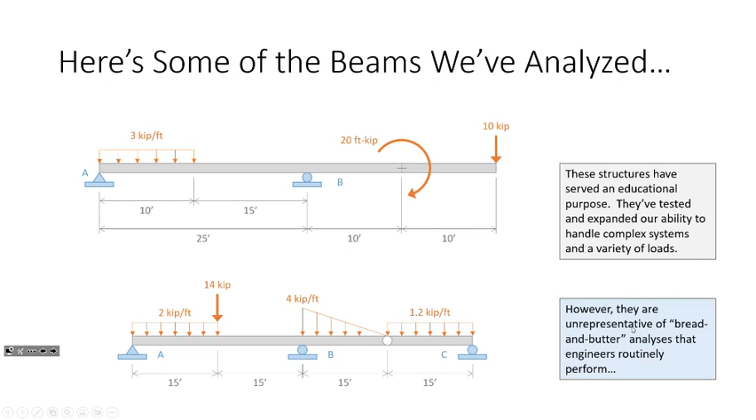These problems each contain components that you will have to deal with in the real world. We've seen how you need to understand how to deal with concentrated moments in order to apply virtual work to determine rotations in beams. You do have to deal with triangular loads for things like hydrostatic effects and snow. But I'm just going to be frank with you. You are not going to deal with these in the real world. You're just not. I'd love to be able to tell you that you were, but these are not representative of bread and butter analyses that engineers perform on the regular. This is not normal. It just isn't, okay?

That's normal. It is a normal beam that an engineer might need to deal with. Now, I want to take a look at these two beams, okay? So the beam on the left is a cantilever beam with 3 kips per foot distributed over its length, and is 25 feet long. Now the beam on the right is 37 feet long, and it has a distributed load of 1.95 kips per foot over its length. Is there really any difference between these two problems? Really? No. You might say that the only difference between these two are the values of their system parameters.

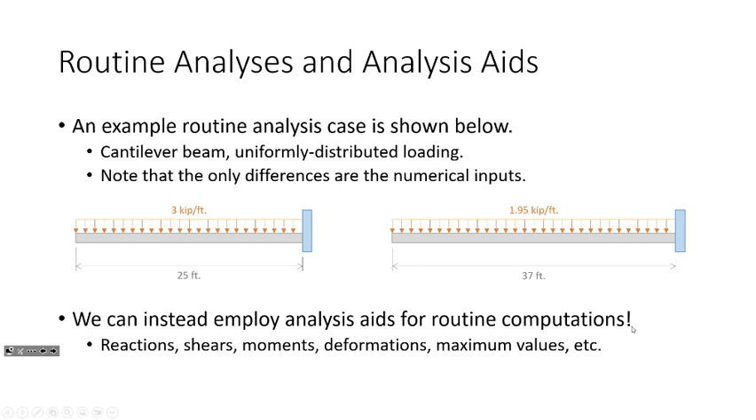So that's the truth. I mean, really, the only differences between these two problems are their numerical inputs. Structural engineers might have to deal with these problems very routinely: cantilever beams with uniformly distributed loads. The only thing that changes are the lengths of the beam and the loads, but the scenario is the same. Instead of having to analyze this beam over and over and over again, why don't we develop some formulas or some analysis aids to handle these routine computations?

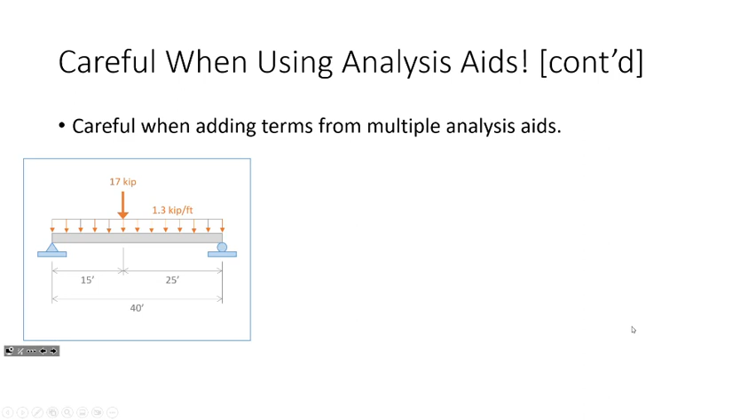Now another thing you've got to be careful about is when adding terms from multiple analysis aids - I'm talking about superposition. Take this beam: it's simply supported with two loads on it - a uniformly distributed load of 1.3 kips per foot. I can look up its Mmax formula, WL squared over 8, and that occurs at the middle.

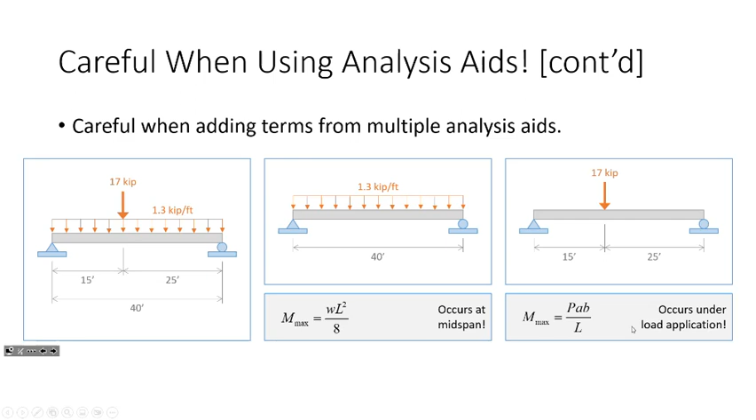Now what about the 17 kips? Its Mmax is computed as PAB over L, where A and B are these two lengths - so it'd be 17 kips times 15 times 25 over 40, but that Mmax occurs at a different location. So you can't just take this value and that value and add them up. It's a common mistake I see engineering students make, and that's wrong, because those maximum points on the moment diagram aren't at the same place along the span.

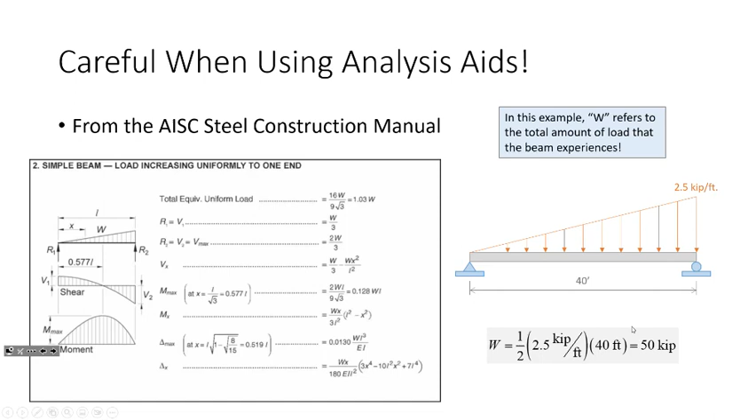So instead of adding Mmax and Mmax, go to the analysis aid and actually add the functions. Then you can either differentiate, solve for X, and plug in, or just do what I do - plot it in Excel. Plot this moment diagram, sum them up, find where the maximum moment is, and use that. Just don't take this Mmax and add it to that Mmax, because they're not in the same spot. Does that make sense? Everybody okay with that?

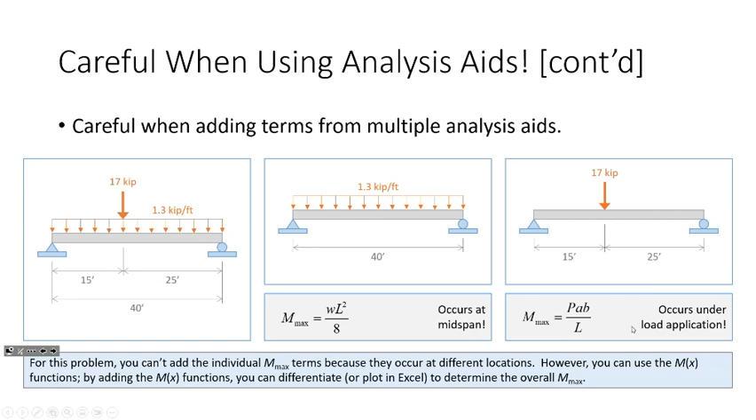So to explain how these work, I want to derive the analysis aids for that beam - the same one we looked at before. I want to look at the reactions, the shears, the moments, and the deflections if time permits, and we're going to get the same answer we got right here. I want you to understand where these come from. If you take me for steel design, we'll use some of these near the end of the semester, so I want you to see where they're coming from.

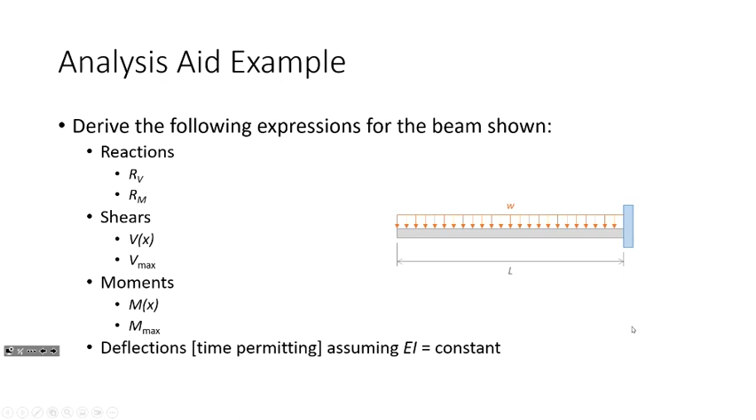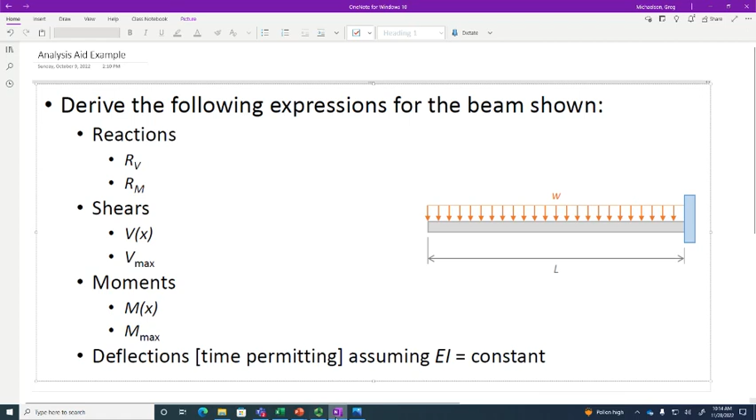All right, so let's see. What we're going to do is derive formulas for each of these components. Let's start off with the reactions.

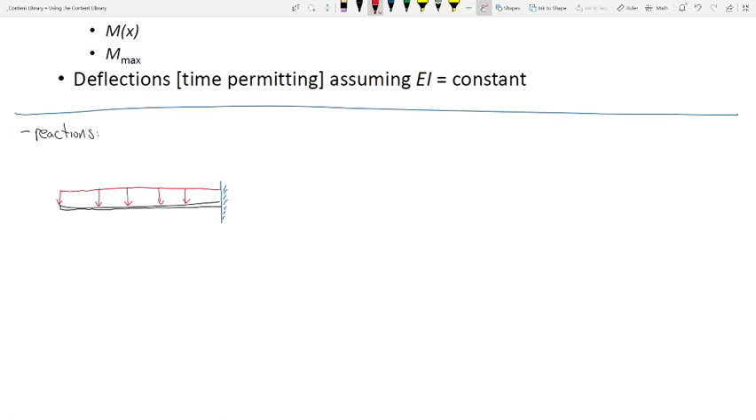Nope, let's not do that. Put that over here.

We do this like any other problem in structural analysis, just a little more alphabet soup. We take that distributed load and collapse it into a point load. What's the magnitude of that point load? WL. There you go, WL. We're going to have two reactions: a vertical reaction, which we'll call RV, and a moment reaction, which we'll call RM. Nothing special about those terms, I just made them up.

So let's sum forces in the y direction. We have WL going down, RV going up. Pretty simple.

What about moments? Let's sum moments, and what I'm going to do is sum moments at the support. If I'm summing moments at the support, I do not need to consider RV, but I do need to consider RM. And then what do I have? I have WL times a moment arm. What is the moment arm between the support and that idealized concentrated force?

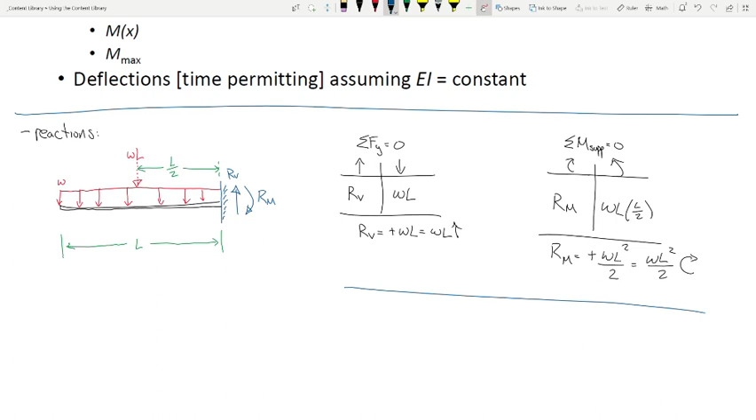Let's take shear and moment diagrams, and I kind of drew a line here, and you'll see why.

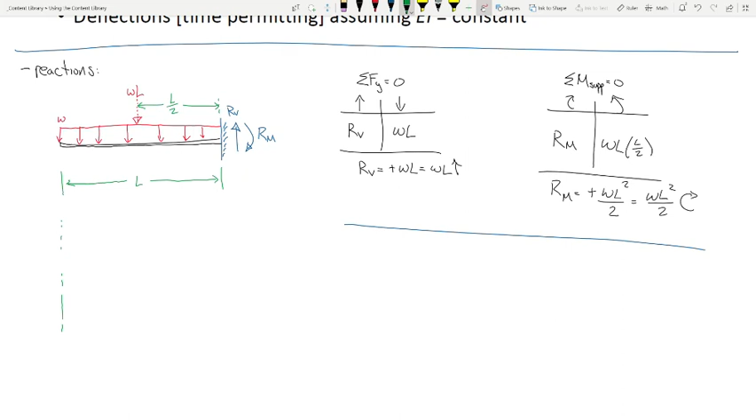All right, let's start off with the shear diagram. Notice I'm not even going to worry about units because we don't care what units we're talking about with this—it could be SI, it could be US, it doesn't matter. How do we draw a shear diagram? Start at 0, hopefully end at 0. So what do we find?

A distributed load acting downward, a constant load, causes a linear shear diagram. So we linearly decrease downward to minus WL, and then the reaction RV brings us back up to 0.

How do we draw the moment diagram? We integrate this. What is the area of this triangle? 1/2 of L times this.

Our moment diagram starts at 0. Linear shear diagram turns into a parabolic moment diagram—little to a lot, we go to minus WL squared over 2. That jumps up.

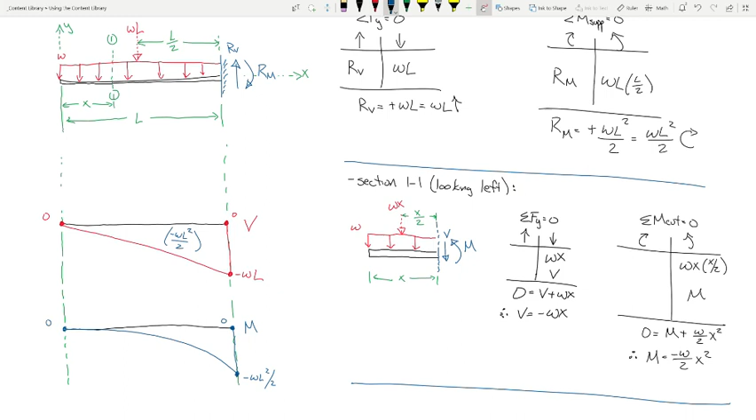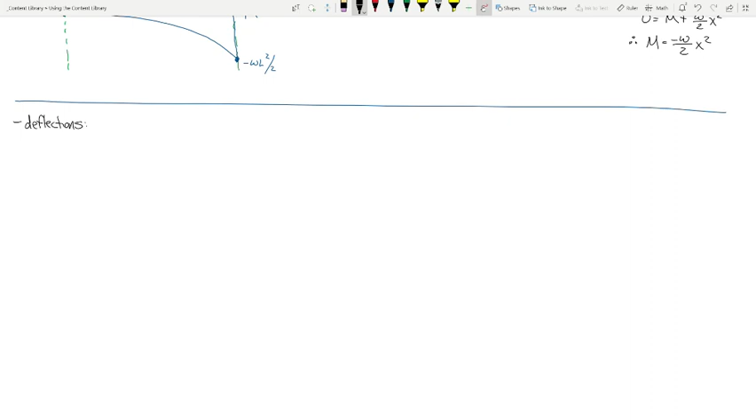Now let's look at deflections. Where do you think this beam is going to deflect the most? Let me scroll up, put this in context. Here's the beam. Where do you think the maximum deflection is going to occur?

Say it again. Is it going to deflect the most in the middle, or the whole distance L away from the support? Over here, that's the maximum deflection, right? So as an engineer, maybe I'd be interested in developing a formula that I can compute the deflection right there at any time.

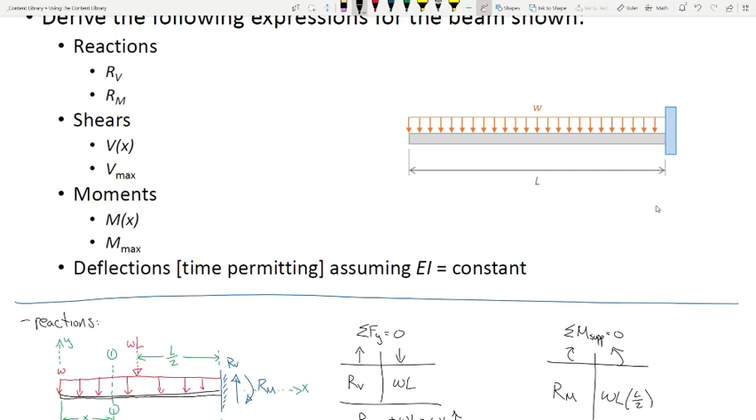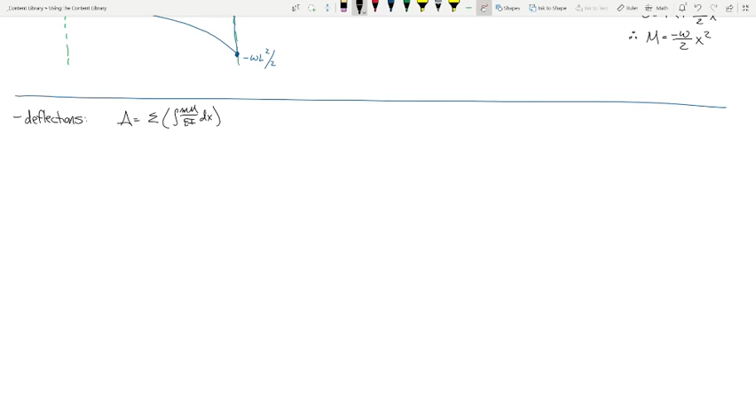How do I do that? Well, let's see. Our trusty friend, method of virtual work. So I need the real structure.

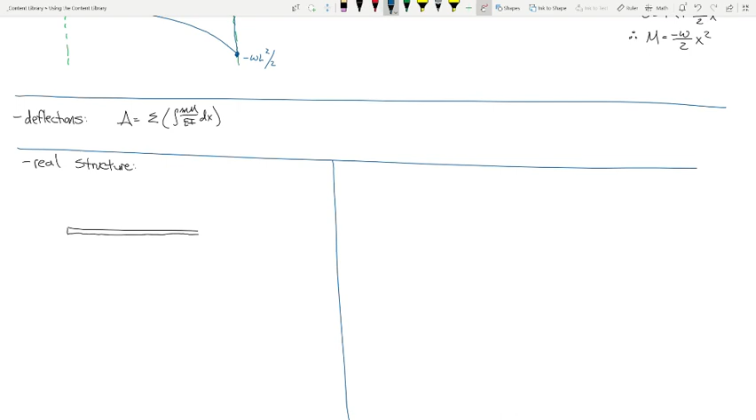How many functions do I need to define these moments? Well, just one. I think I already figured that out. There's your moment function. What about the virtual structure?

So the virtual structure, place a unit load right here, because that's where we think maximum deflection is going to occur, right? This dimension, oh, I need to put an L.

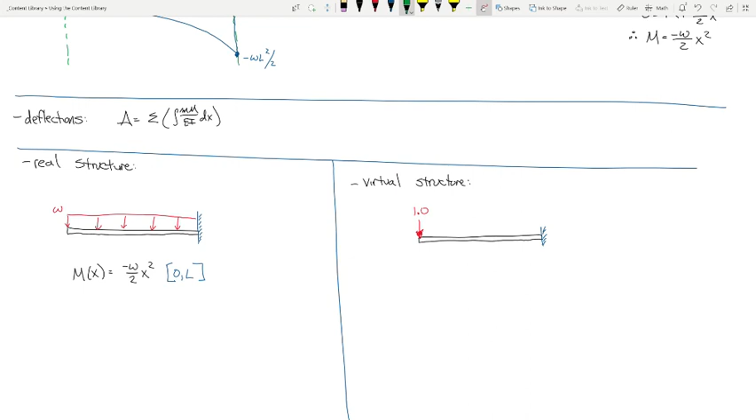Okay, so cut a section. Real and virtual, or the virtual shears and moments, I should say. Sorry. Bronchitis is not fun. All right.

So, we have 1 times x, and then our virtual moment function, both rotating this free-body diagram that way. Excuse me.

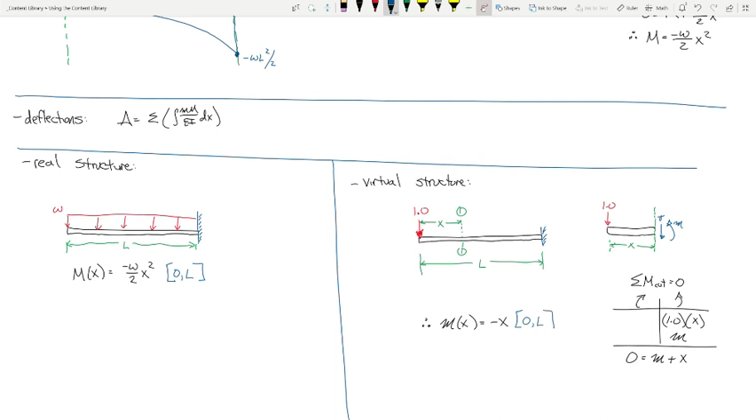Well, that's got to be familiar, doing that stuff. I love this topic, and I love doing it at the end, because not only is it a nice informal review of everything we've been doing this semester, but there's a tangible benefit that we never have to analyze this problem ever again, because the formulas are figured out.

How do we figure out the formula? Well, we have a virtual moment function. We have a real moment function. So, break out the method of virtual work.

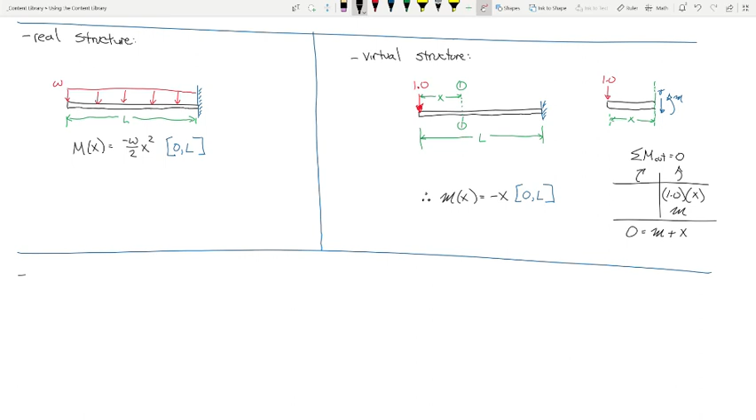So, since we only have one set of functions, we can say that the maximum deflection at the free end is just going to be the integral from 0 to L of m times M over EI dx. No summation of integrals necessary, because there's only 1 and 1.

So, help me out. Little m is negative x. Big M is minus w over 2 x squared. So from these, what is their product?

Making y'all wake up this morning. WX cubed over 2. There you go. Positive.

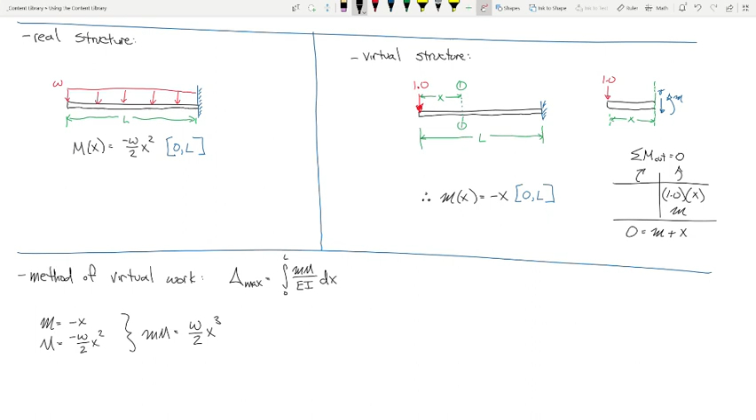Now I should note, and I didn't put this here, although I did in the problem statement, we are assuming EI is constant, which just about every single analysis aid I've ever seen does, except for when it's explicitly stating that it's not, and those are a little more difficult to find. Most of the common analysis aids that engineers deal with assume EI is constant.

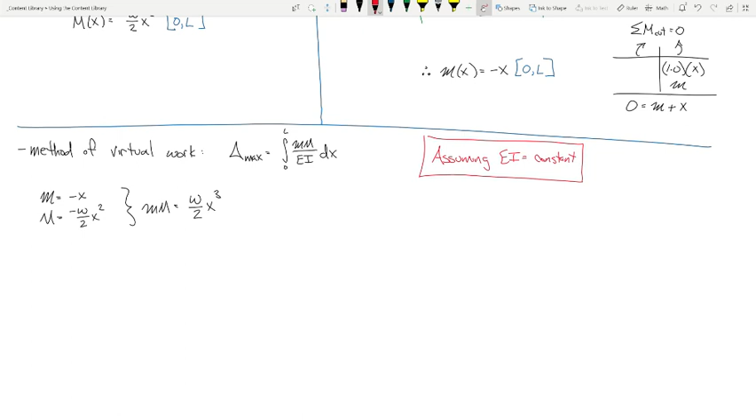Therefore, so what do we got? We've got 1 over EI times W over 2x to the third dx, right? Because it's little m times big M over EI, so EI is on the denominator, and that's our little m, big M, dx.

Now I remember my Calculus 1 teacher told me that anything that's a constant I can factor out of the integral. Is 2 a constant? Is EI a constant? Yes, we're assuming it's constant. Is W a constant? Yeah, W is the 3 kips per foot, or 1.95 kips per foot. Of course it's a constant. So,

Now that's an integral that even I can do. What is the integral of x to the third? I believe that's x to the fourth over 4, evaluated from 0 to L. Fundamental theorem of calculus states I plug in the top number minus plug in the bottom number. So

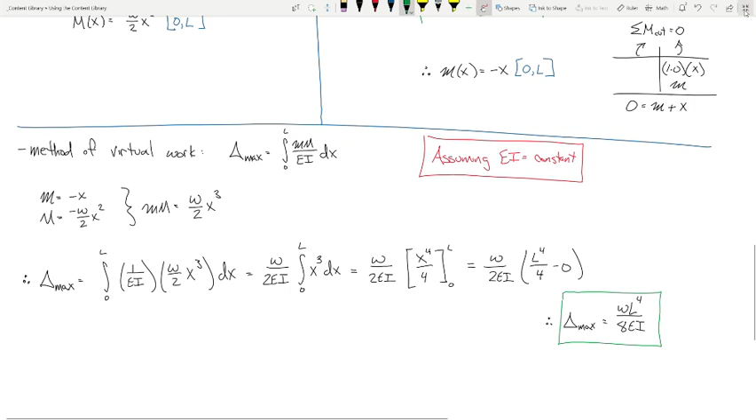And I guess we should be formal about it by saying that that's deflecting downward. You know, I'll tell you what, just to make sure that we're not flying too close to the sun and our wings aren't melting, are we off track in any way?

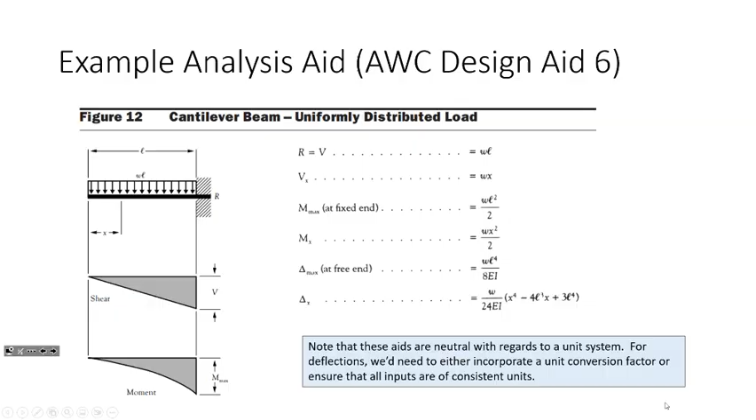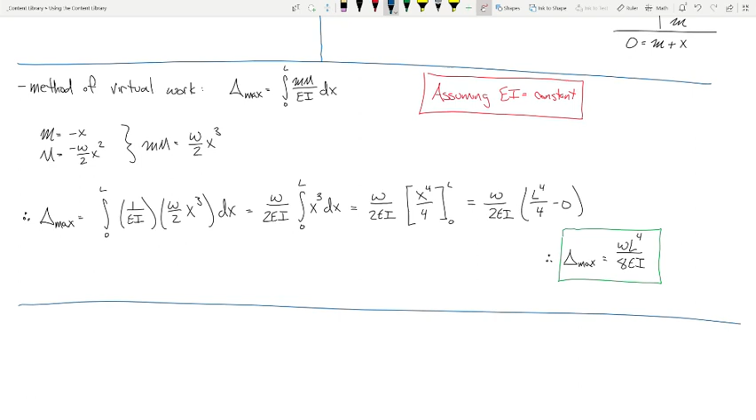So, what we just did is a specific case of deflection. Let's do a general case.

And I'm going to tell you, this is going to get messy from an alphabet soup issue. So I'm going to show you how we're going to do this.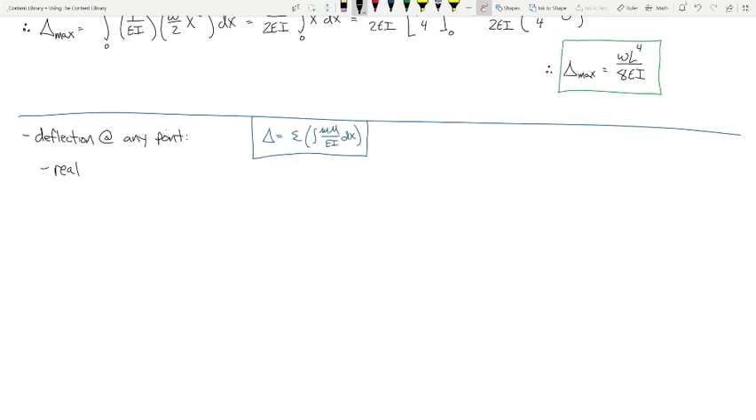So for the real structure, so to be clear, we're still using this. We're still doing that. Okay? That we're still doing. We're still able to use the real structure, which is, we're still able to do that.

Okay? Now what about the virtual structure? Okay. Now, I'm going to show you Dr. Mike's tip and trick on how to do this. This is the trick that I've always used. Okay? And I'll explain why.

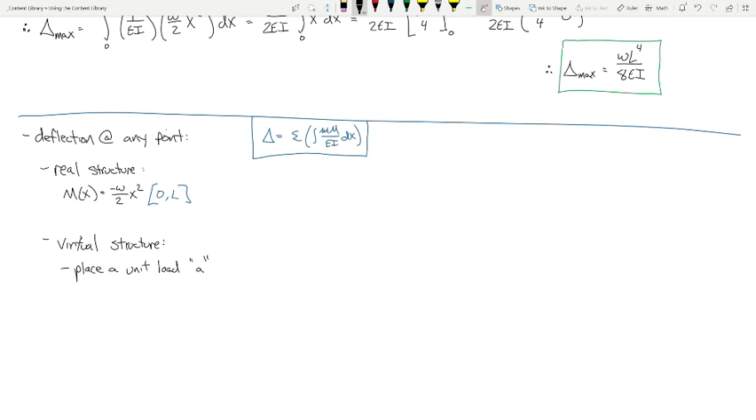I want to place a unit load that is some distance A from the free end. Okay? I'm not saying X away from the free end, I'm saying A away from the free end. The reason I'm doing that is because I'm going to do a lot of integration, and I want X to be my integration variable. A is where I want to find the deflection. And so I use a different letter to make sure I'm not mixing the two up. Because if you use the same letter, it'll get real confusing when you start doing your integration.

So my virtual structure is going to look like this. Okay? This dimension is A, and this dimension is L minus A.

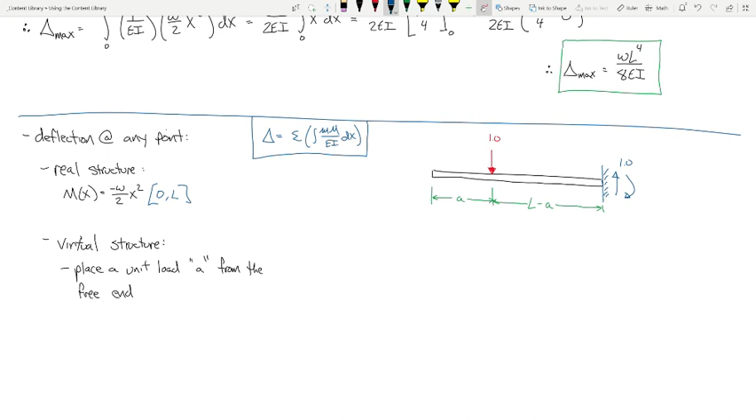Okay? And so I have a vertical reaction here of 1.0, and then my moment reaction ends up being L minus A. Okay? I'm not going to make you do all these statical calculations right here, but I think based on what we've done with the theory of influence lines and what have you, I think you'll find this is pretty easy to follow, right? Because we'll have a shear diagram that

Here's 0, minus 1 over to minus 1, jumps back up to 0. The area of that region is just that rectangle, but negative since it drops downward. And then the moment diagram, maybe I should use the small letters there. This is, so that's 0, down to negative L minus A, brings that back up to 0.

And so we're actually going to have two functions. We're going to have a function here and a function there. Now, M1 is 0, and that is valid from x equals 0 to x equals a. But then we're going to have another moment function which equals something, and it's going to be valid from x equals a to x equals L.

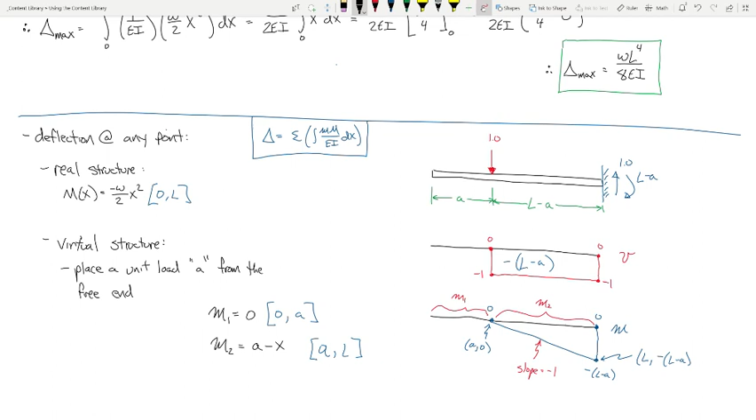And we can go through that if you'd like. Here, we'll do it over here real quick. So we'll do it like this. So not very challenging. Just use that point and that slope.

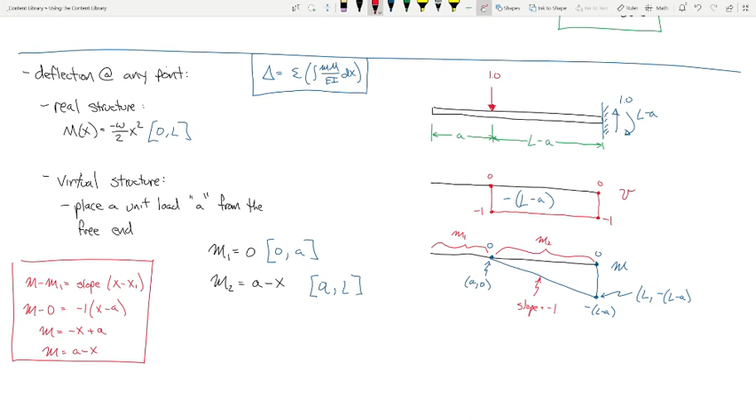So in order to determine the deflection at any point, here's how we're going to have to do it. So remember, the method of virtual work is to sum all of the integrals.

Well, now we're going to have two of them. We're going to have one integral from 0 to a of m1m over ei dx plus another integral from a to l of m2m over ei dx. But what's going to happen with that first integral?

What's going to happen with this first one? What is m1? 0, right? So because this is 0, I'm integrating 0, that whole integral can be ignored. This whole integral goes to 0. And I should say, m1 is 0. So that's why.

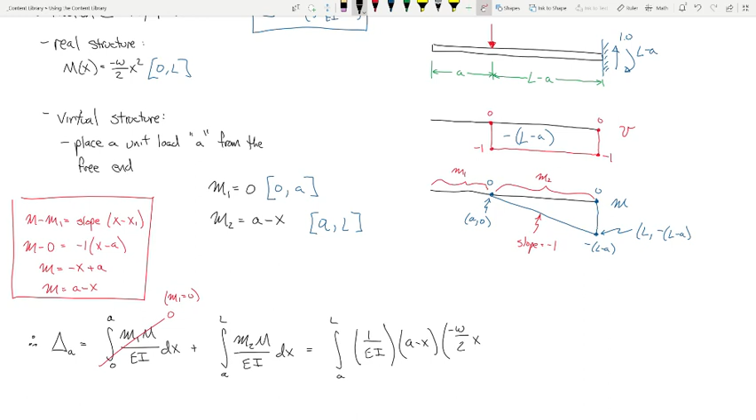So this equals one over ei, little m, big M, that's the integral. Again, I know it's alphabet soup. I'm sorry. I can't do anything about that. I can't make the alphabet soup go away, but I can calm it a little bit by factoring that out.

And doing that. Or this. Now, that is an integral that you all should be able to do by hand. It's going to take a little bit of math, I know, but we have the integral of a times what? X squared, which is x cubed over 3, minus x to the fourth over 4. Plug in the top number, minus plug in the bottom number. That's supposed to be a. I don't know why that was written as 0. It's supposed to be a.

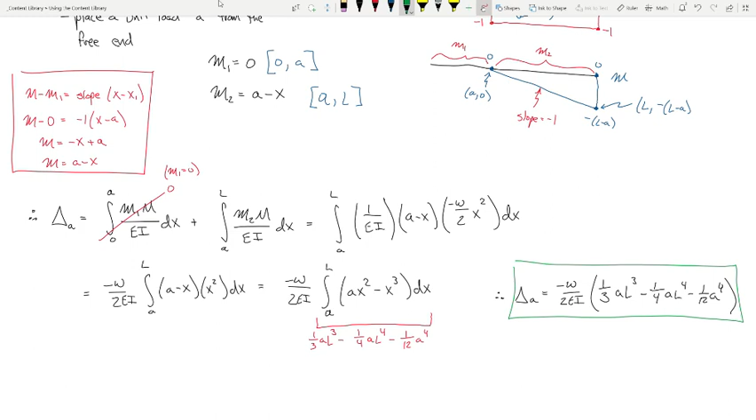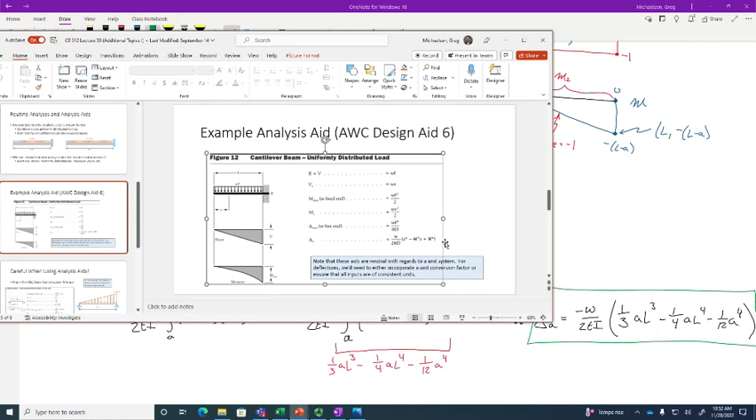And so that'll tell you the deflection at any point. Now, how does this compare with what we had previously done? How does this compare? Or sorry, not with what we had previously done. How does this compare with our analysis aid? Okay, so here's our analysis aid. Let's see what they did.

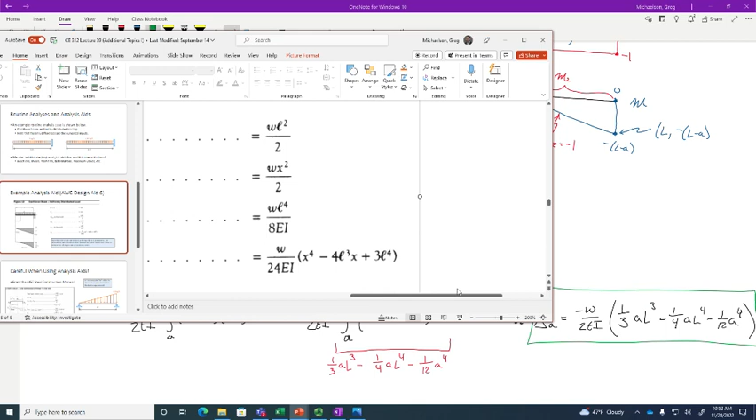Okay, so the first thing that you'll notice is they factored out the denominators. Okay, and so what they did is they divided everything by 12, essentially, so they turned this into, or made everything to have a 24 denominator. So this one right here, instead of 1/3, or no, sorry, this one's like 2 over 24, and so on and so forth. So they just did a little bit of algebra to simplify that out.

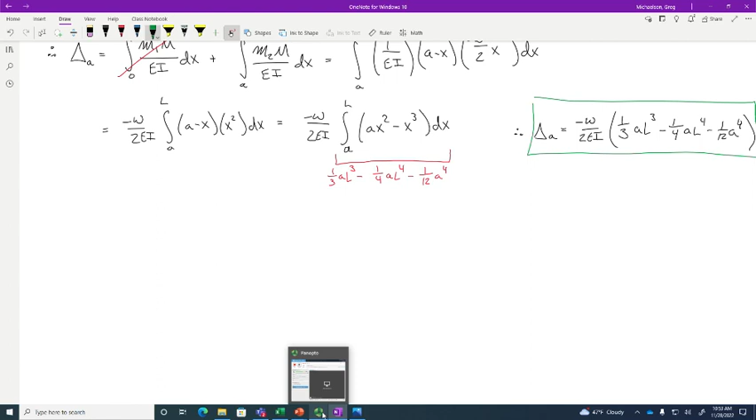I can carry that out if you'd like. Let's go ahead and do that. Well, we're running out of time, so I don't have time. Basically what they do is they multiply all that through and then carry that through. I'll do that on the calculation right down here, but I'll go ahead and let you all go. Let me pull up the code real quick, and then for anybody that didn't get the code, I'll fill in the rest of this deflection calculation for your notes, and I will see you all on Wednesday.